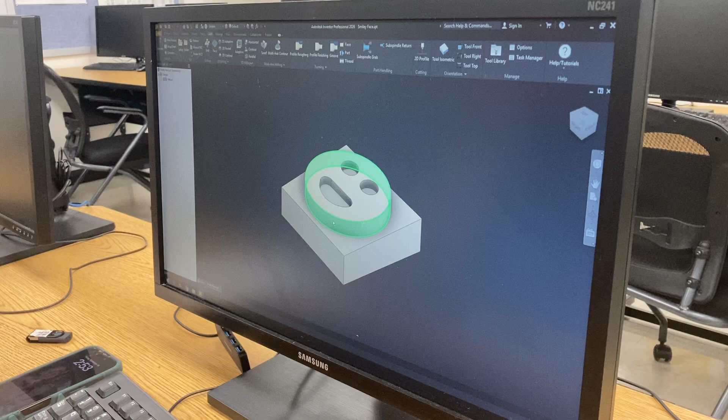Okay, so this is where we're going to begin programming to mill our cute little smiley face right here out of our piece of aluminum. And so a couple of considerations. The first thing we want to note is that we've already created a setup for this piece, and that is setting our origin point for our X, Y, and Z axes.

And if you're thinking, wait, whoa, how do I do that? I can't remember. We have explained this before in our Haas tabletop mill tutorial series, so you can revisit that for setting the origin. We're just trying to save some time here because we are trying to look into new considerations like we see over here.

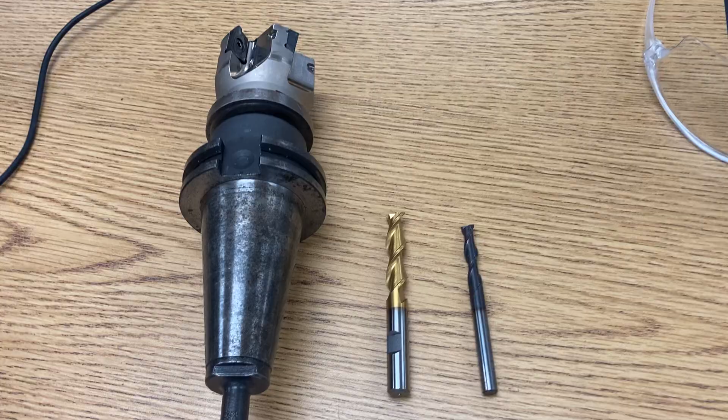We're going to be creating a tool pathing program that incorporates 3 tools. This face mill that you see right here, that 3/8 inch end mill, and then this 1/4 inch end mill. Now, I think it's worth asking, why would we do this? Why would we want to use multiple mills when you'd think it's easier to just make a program for one? Why can't we just use this 1/4 inch end mill for everything, to cut out

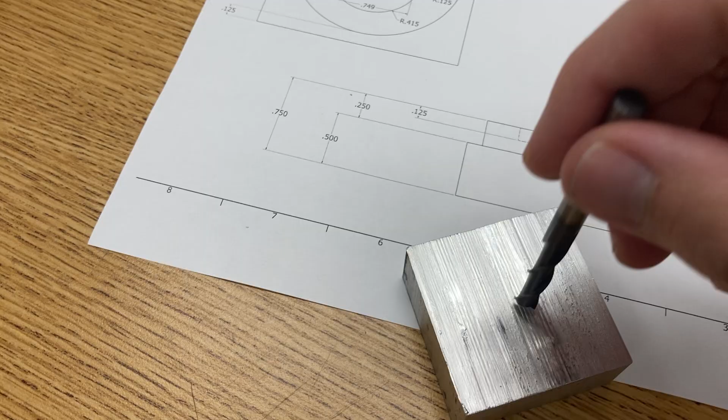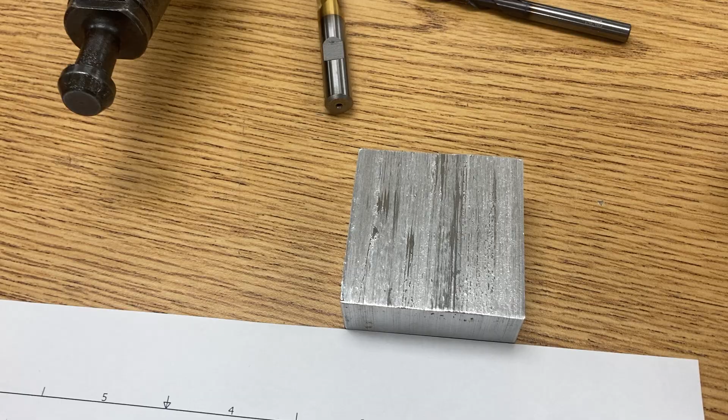this piece of aluminum? Well, that's because it's actually not a very efficient tool path to try and cut all that material when we could do a lot more in fewer passes with a larger diameter end mill. The same way that if you had to mow 5 acres of grass, you'd much rather have a lawnmower to do it than a weed eater. But if you have a tiny little patch in a corner near your house that you have to get into, that's the time when you want the weed eater instead of the lawnmower.

And this face mill has a very specific purpose itself. It's going to do the first task, which is cleaning up this, as you can probably see here, pretty crooked top part of our piece of material. So I got a nice stock bottom here, but the top is pretty rough. So the face mill is going to come along and clean this off for us.

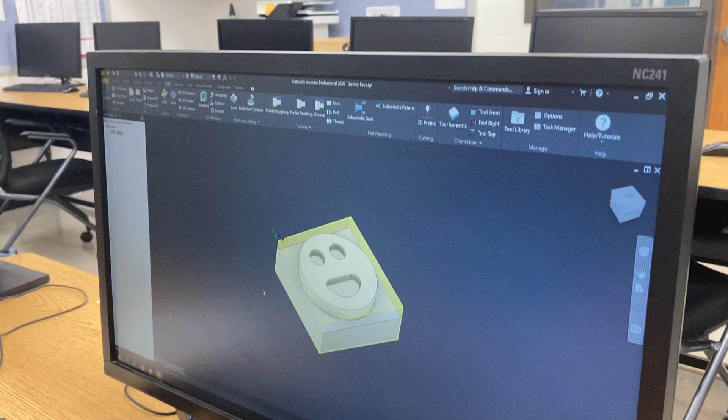So now that we understand why we are using multiple tools, let's get into how we actually set this up to incorporate tool changes and whatnot. I've got Mr. Monroig here to help us out. Mr. Monroig, are we going to start out with the adaptive to program for this face mill? No, we won't use an adaptive toolpath for that.

We have a facing operation here under our CAM tab, which should also be in the tabletop demonstration, like where to find stuff. So starting out, we're gonna click our face operation, and the first thing we need to do is give it a tool to use. So we click our tool tab up here, find our library. In our libraries, we don't have a facing mill, so we actually have to build the tool real quick.

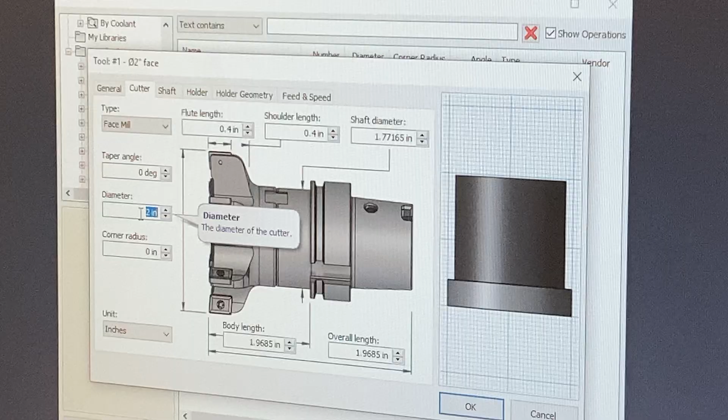So we have tool type is a face mill. How did you find that? Underneath my tool, when I click my tool, it comes into here and we just click new mill tool. Oh, you said new mill tool. Okay. Yeah, new mill tool, and we open that up, and your tool type's a face mill. The diameter of our tool is a 2-inch face mill.

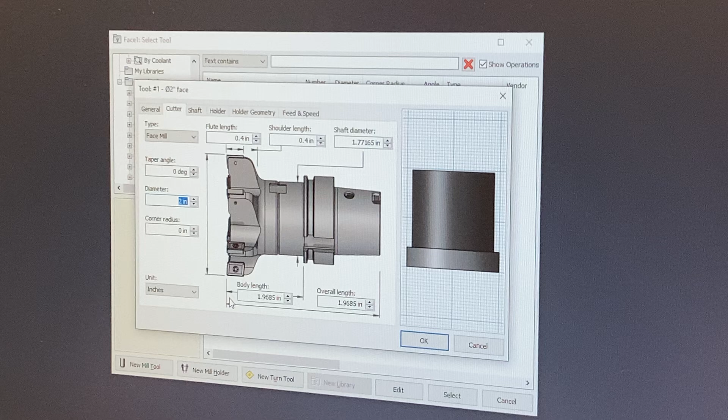Our flute length, all this is pretty standard. We don't need to really change it. We're not going to do anything too aggressive as far as our depth of cut or utilizing the side of the cutter at all. We're mainly just wanting the inserts and all that to stay the same. All we need to make sure is that diameter is right. And our tool, this is going to be tool number 1, and use offsets 1 for the length, whenever it looks for it in our tool library. Don't need to change anything here.

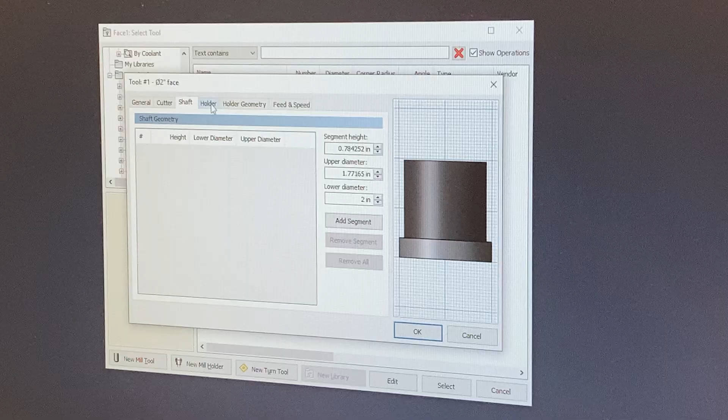Our speeds and feeds, we're going to run this at 2,000 RPMs, and we're going to feed it at 25 inches per minute. And this is because of the fact that we're cutting through aluminum? Yes. Okay. We could be a little bit more aggressive, but we're going to program this in a more conservative manner.

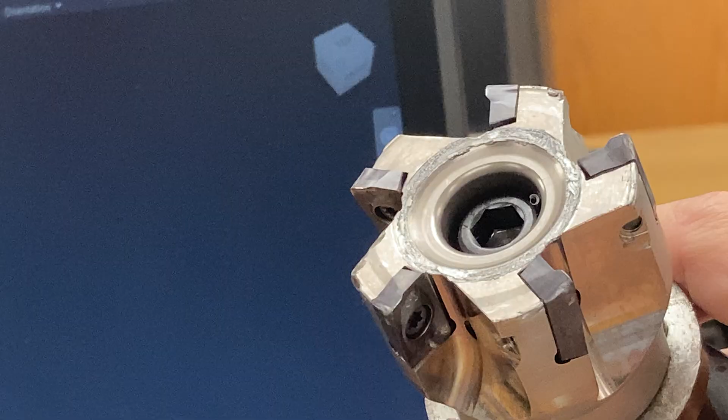And I noticed you're accounting for the number of flutes. Yep. So he's putting 5 on there because there are 5 teeth on this end. And the reason that gets affected is your feed per tooth, which you use in your calculations for your feed rate, varies based on the number of teeth that you have. So we're going to hit OK here. You can see our tool is in our library now. We're going to select that tool.

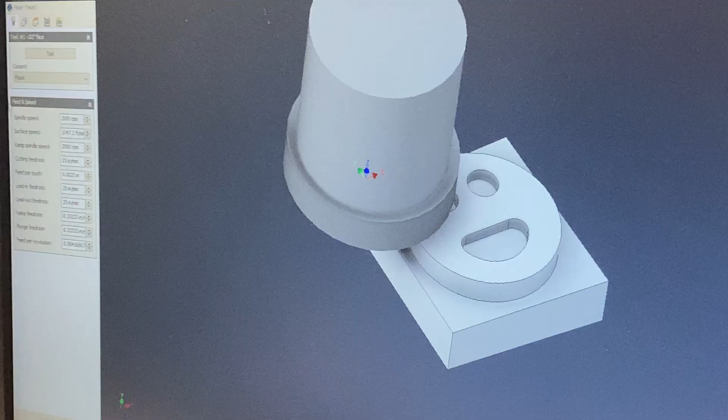And then it went in here and it changed all of our spindle speeds and feed rates already for us, because we put all that in when we built the tool. So the next thing that we're going to do is go to our geometry tab. It already has the default stock selection. It sees the stock that we want to cut there, so we don't need to do anything with that.

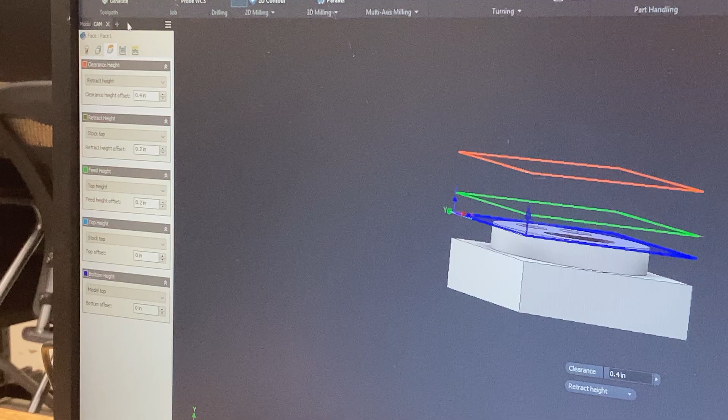Your levels here, you can see it's cutting at the top of our finished surface already, our model top in here, so we don't need to make any changes there. We'll go to our passes tab. Your step over, it's gonna use a little less than the diameter of the cutter for a step over, so there's a slight bit of overlap for good cleanup. But since our material size is under 2 inches, it should just do this in one pass unless it offsets. So we might need to make a change after we generate the tool path.

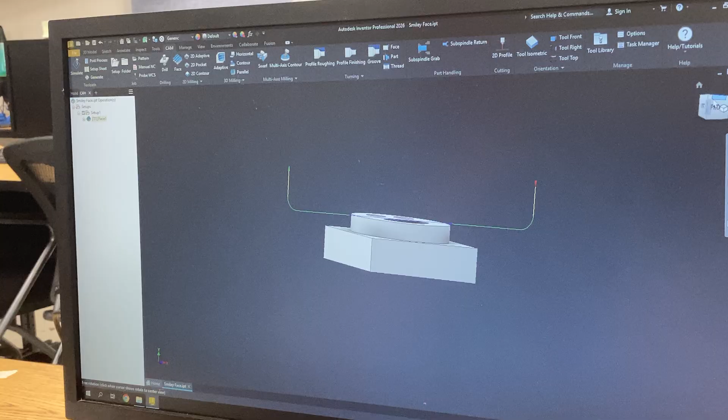And then our linking parameters, the only thing I ever really want to do is I want it to extend before I retract, so it gets off of my part before the tool holder comes up, so it doesn't leave marks on my part. So we're gonna hit OK here and see what our path generates. And there you can see it makes one pass, comes down, across, and up. So that's our facing operation.

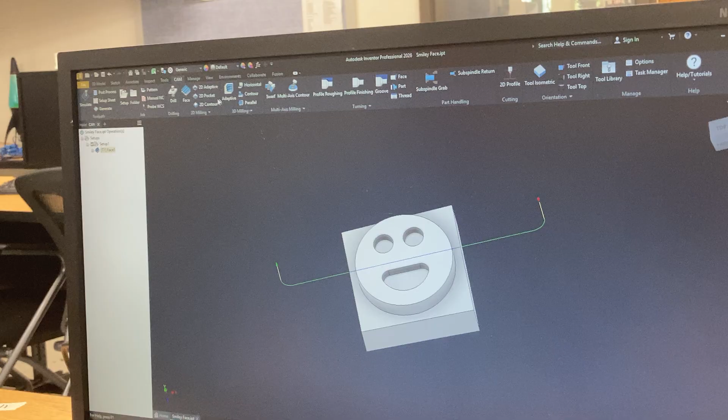Now, like Dr. Stratman said, we don't necessarily want to use our face mill to come in here and get rid of all this material. So this is where we're going to utilize our 3/8 end mill and go into an adaptive path. We're going to use 3D milling, not 2D milling. The 3D milling will look at your model and cut only the stock that it detects, and it will not cut into your part. So we're going to do that 3D adaptive.

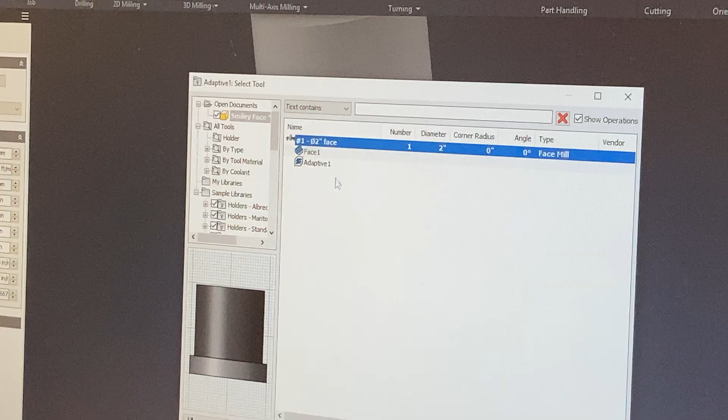So now that we're in our 3D adaptive, we don't want to use our 2-inch face mill, so we need to go back into our tools. We're going to go down into this inch aluminum library right here. We're going to search flat for a flat end mill, and we want a 3/8 flat end mill, and we are going to select that for our tool. We don't need to change any of our geometry of our cutter. What is there will work just fine. So we have our 3/8 end mill.

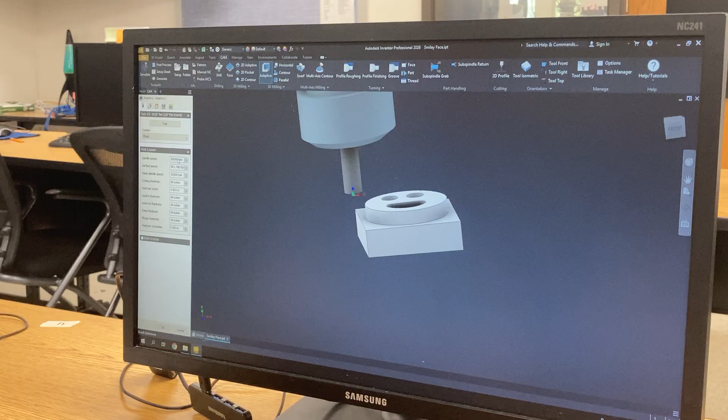We're going to bring our RPMs down. We don't want to run 10,000 because our spindle max is 6,000 on those. We're going to put this at 4,000 RPMs, and we are going to do a cutting feed rate of 60. How did you determine that cutting feed rate?

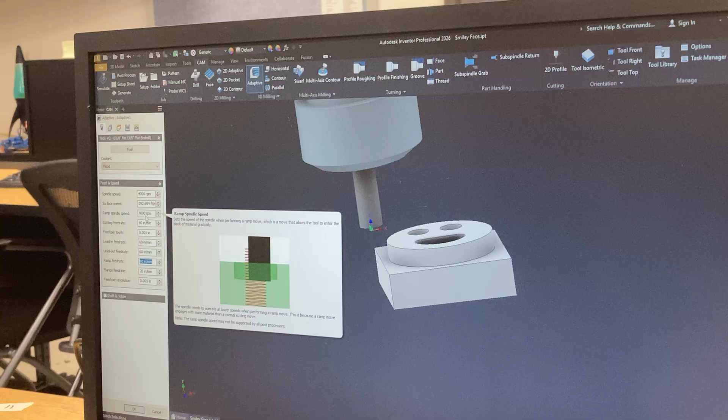So when we're cutting aluminum on a CNC and we have rigid tooling and stuff, we can be a little more aggressive than what we can on a standard Bridgeport. So your normal 3.82 calculation doesn't necessarily get you what you want, because aluminum can be calculated a little bit differently. If you go too slow, your tools are going to load up and gunk up with chips. They're not going to clear.

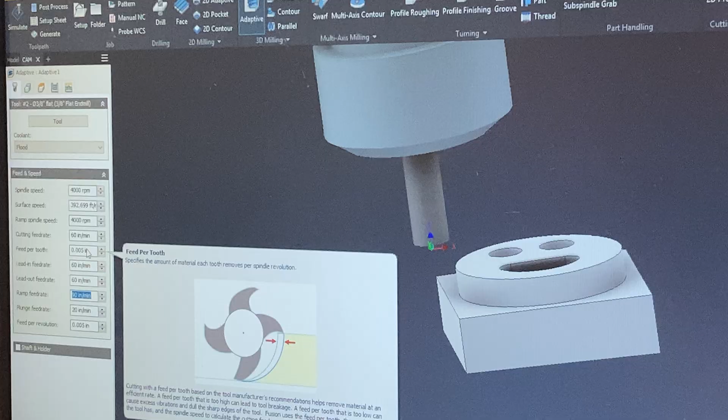And a reason that we go high RPM, high feed rate is because later on when we get to our passes tab, we're going to look at our tool engagement, and it is faster for a machine to run fast RPMs and fast feed rate but take less of a cut, because that tool is not having to slow down so much to get through the part. It's easier on your tool, and it won't wear down or break as quickly. So we will ramp up our feed rates here and do a lighter step over so that we can get this done as efficiently as we possibly can.

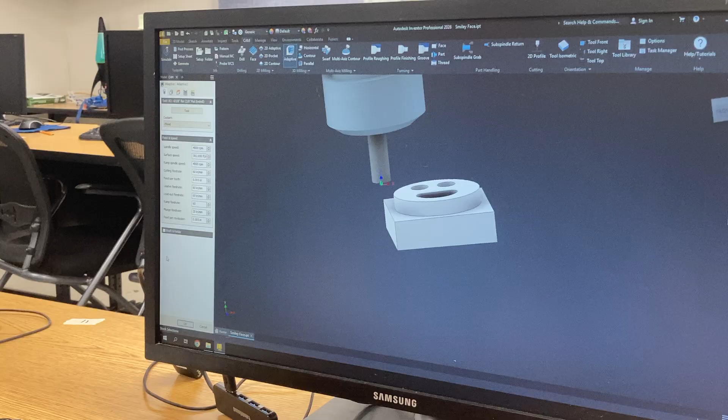Okay. So you can see, whenever we put an RPM in there, 4,000, it calculates our surface feed to be 392. So that's like when you're looking at your equation, your 3.82 times your surface feed divided by your diameter. That's the surface feed that it's using to run at 4,000. If we wanted to do like a standard 200 surface feed. Yeah, that's kind of why I was asking, because I know the aluminum set value is 200.

So if you use your surface feed of 200, it's going to put your RPMs in there at like 2,040, which means you're going to have to slow your feed rate down. But with aluminum and these cutters that we have today, if you ramp up this value, as long as you put the feed rate in to go with it, the tools can do it, especially in aluminum.

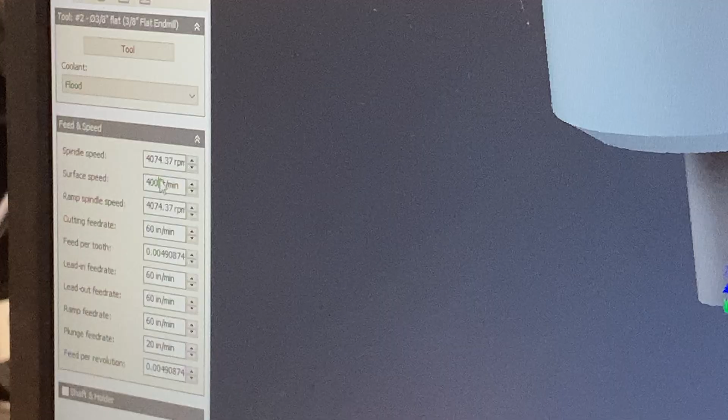If it was steel, we would look at this in a whole different manner. But the fact that it's aluminum, it makes that okay. We can be a little bit more aggressive. Because it's a soft metal. Yes. Okay. So for the sake of this example, we're going to just use 400, or 392 I think is what it was, to get us close to that 4,000 RPM.

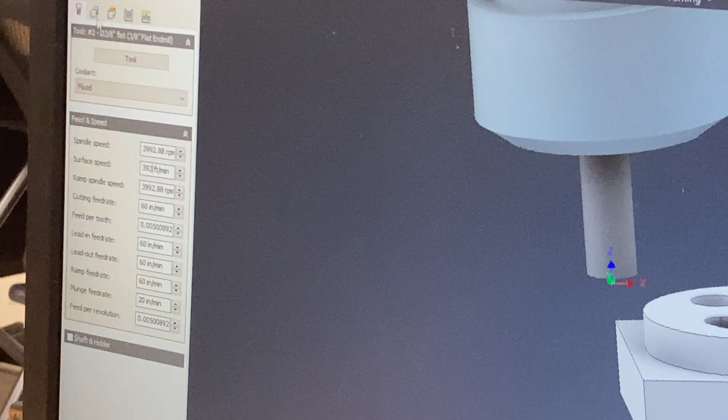We're going to feed it 60, and with something like machining, while you can calculate this stuff, it's not exactly a finite thing like you have to do this. Your machine will talk to you. It'll let you know by the sounds if it's right, and then you can manipulate it at the control. You can speed it up or slow it down if it sounds right or wrong. So we'll go with this for now, and if we need to modify our values at our machine, we can do that later. So we're going to go to our geometry tab, and we don't need to select any contours.

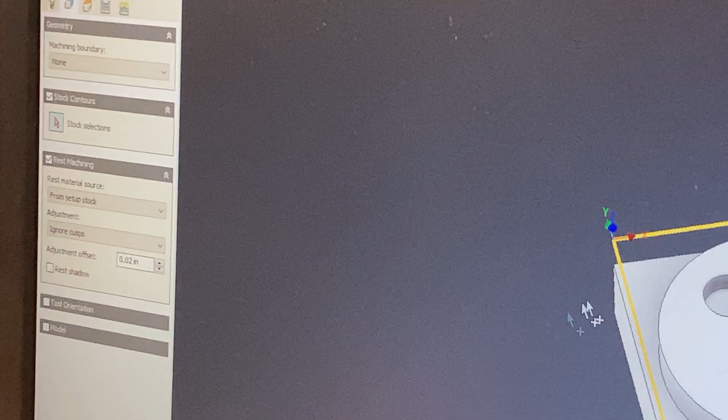It's going to look at our material in our rest machining here, so it's going to see what has been cut if we change this to from previous operation. So it's going to see that previously we faced our part, but that there was nothing else cut from the stock that we made in our setup. Yeah, so it can see what work still needs to be done. So we don't need to set any boundaries or anything like that, because we're wanting it to look at the part and get into the areas that it can.

And then our bottom height, we do not want to cut all the way down to our part. We only want to cut to this surface here. So I'm going to change my bottom height to selection, and then I'm going to select this face right here. You see it light up? Yep, this should be familiar to anyone who's watched our Haas tabletop tutorials. Yeah, so we select that. We have our selection set there.

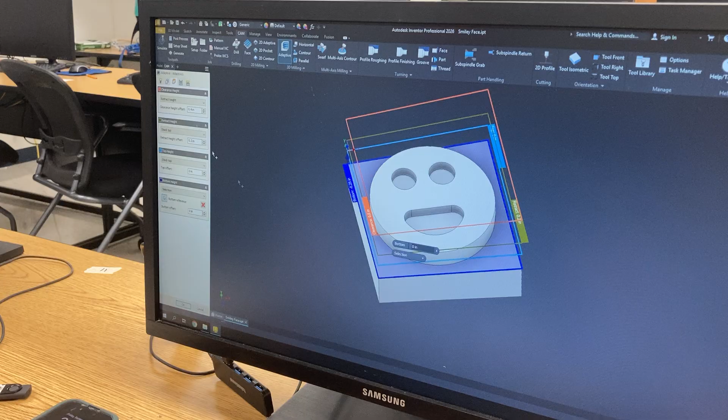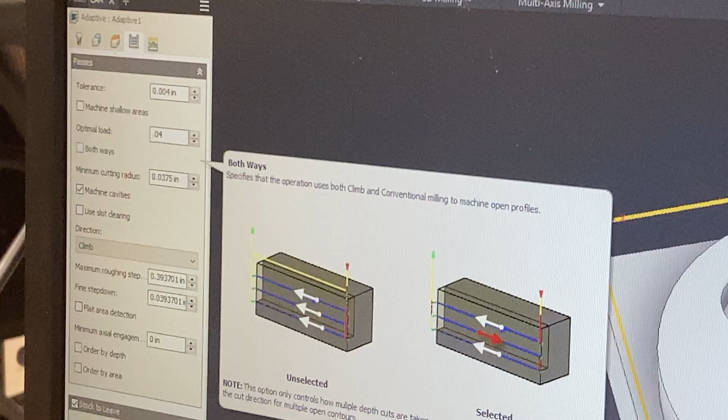Now we're going to go to our passes tab, and this is where we're going to look at our optimal load. So our optimal load is basically the amount of engagement that the tool will have in the given part. Like how much material it's trying to bite off. How much it's stepping over into the part. So we're going to set this value at 40 thousandths, because at our RPMs and feed rate, we don't want to do too much because it's going to put a lot of pressure on the tool and could break it. 40 thou is a good amount for a 3/8 cutter to effectively cut. So we're going to go with a 40 thou step over.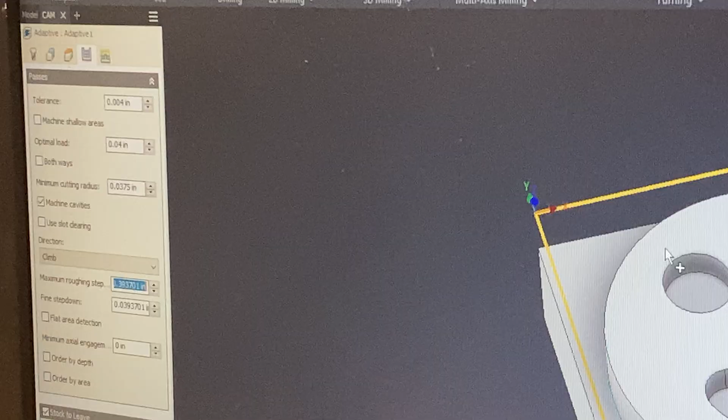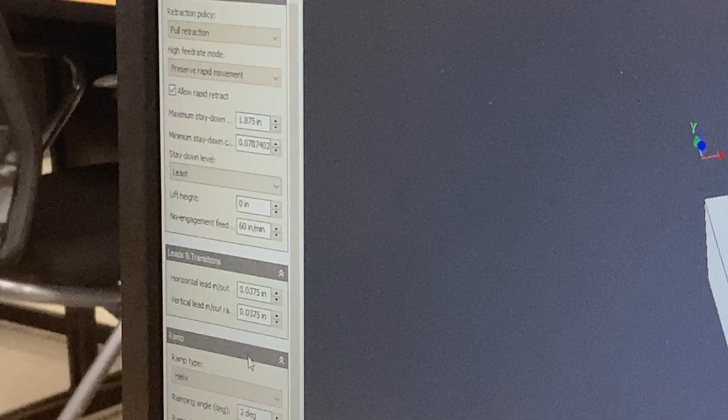For this tool, we're not going to mess with our lead-ins and lead-outs. What we have here will be fine. So we're going to leave all of this the same, and we'll revisit this when we go to our next tool. So we're going to hit OK to generate our tool path. And there you can see it generated our adaptive path. Okay, so this is now officially a more complex program than anyone who's worked through our tutorials before has done, because we now have a tool change in here.

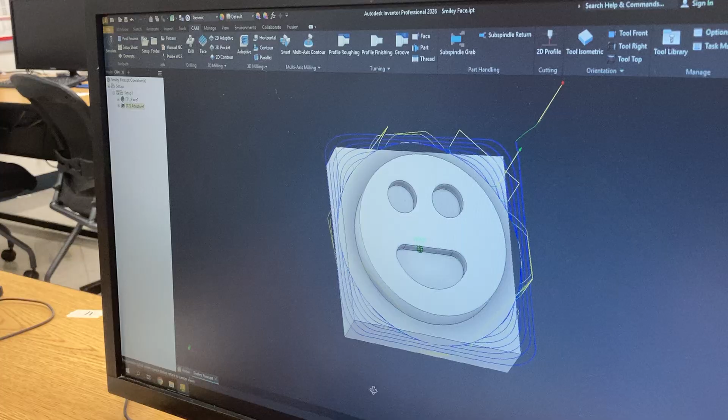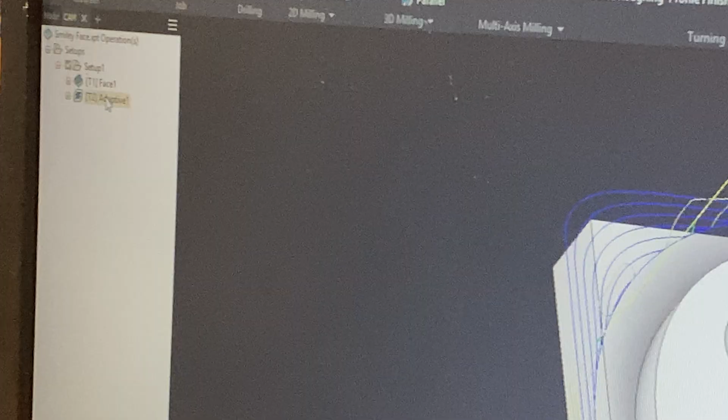I can see in the setup you've created, it says face 1 and adaptive 1. So the program already knows, as soon as it's done running the face program, it's going to automatically jump into that adaptive, and that is going to cause the machine to do a tool change, to put the facing mill away and go grab the 3/8 inch end mill out of that carousel. So that's something that is auto done by Inventor when it creates its program. Yes.

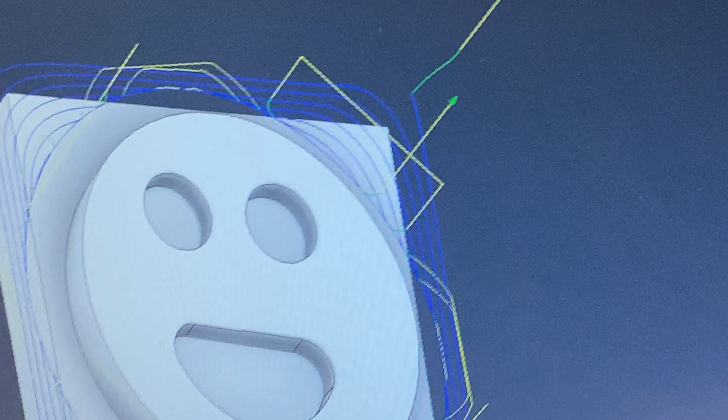So that leaves us with our 1/4 inch end mill, and it's going to serve a very important purpose, because as we can see, the bigger exterior area the 3/8 end mill can get to very efficiently, but it cannot fit into these little eye holes, because a 3/8 inch end mill is too wide to get into these little 0.33 diameter holes. And so we need something skinnier like this 1/4 inch end mill to do that. So let's get into that final tool change.

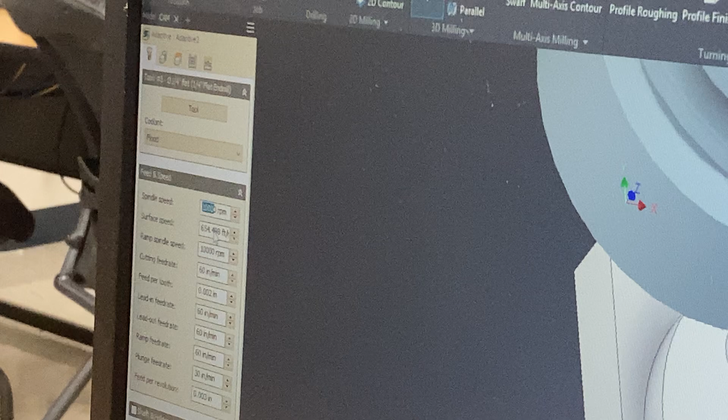So here again, we're going to start off with our adaptive clearing tool path. We're going to go to our tool tab. We will go to our inch aluminum, type in flat again, grab our 1/4 inch, and this one we'll actually use our 200 surface feet because we're gonna be having to helix down into our parts. So we're gonna run a little bit lower RPM, a little bit slower feed rate, maybe about 25 on our feed rate. 2 thousandths per tooth is okay.

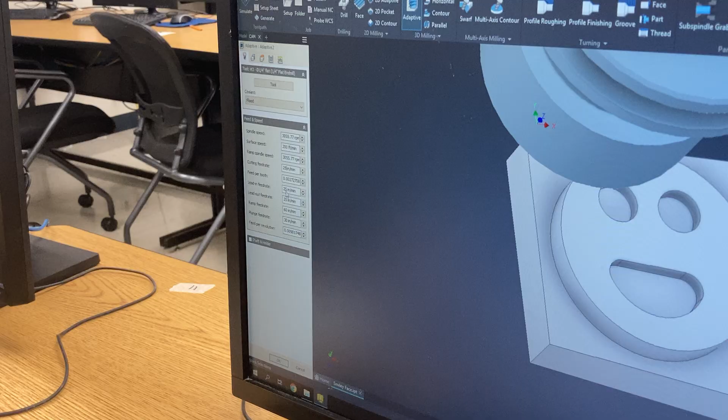And then we're gonna bring our ramp feed rate down to 18 and our plunge down to 10 because we don't want to plunge or ramp too aggressively into our part. We want to make sure the tool has time to cut, and we're going to leave those feed rates the way that they are there.

We're going to go to our geometry. Now here we do want to give it some boundaries because we already cut all this profile out here on the outside. We want to stay within these boundaries here. So the smiley face of the circle, eyes and the mouth. So we're gonna select boundaries. Under selection here, we want to keep the tool inside the boundary, and we're gonna select both of the eyes and the mouth of our smiley face. So we want to cut inside these 3 areas.

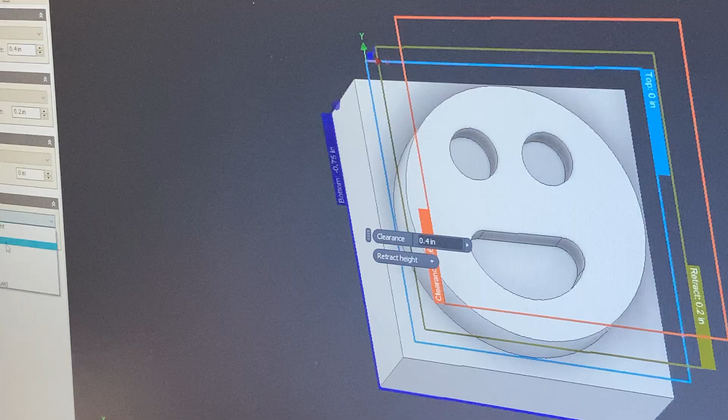We're gonna let the rest machining see the previous operations, what has been done, just like we did on the previous one. So we selected previous operations there, and we'll leave everything else the way that it is. Our depth, here we want to do our selection again as well. We want to select the floor of our eyes and mouth. If you orient that to the side, you'd be able to see that you've selected a different depth because we're not going all the way down to this edge. We're going to the base of where that eye and mouth are because it's a different depth. Right.

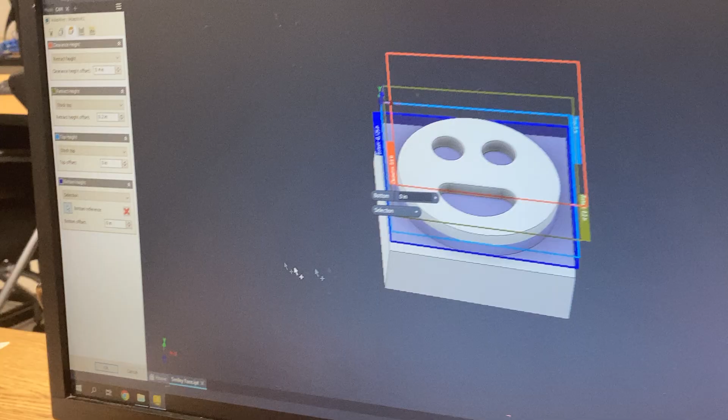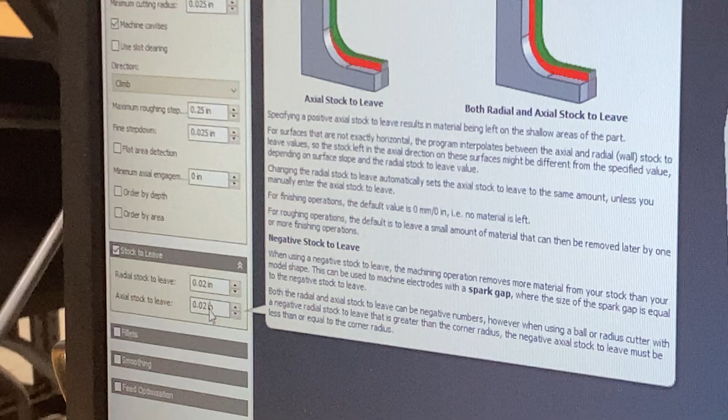So we have that set. Now we're going to go to our passes. For our optimal load on this, it's a smaller tool, so we want to be less aggressive. We're going to go with a 20 thou engagement on our tool. Our roughing step down, we'll make it 0.25. 1/4 inch is our max step down that we're going to do with this one. Fine step down's fine. Everything here is fine. We're going to turn our axial stock to leave to 0. Radial, we're going to leave 20.

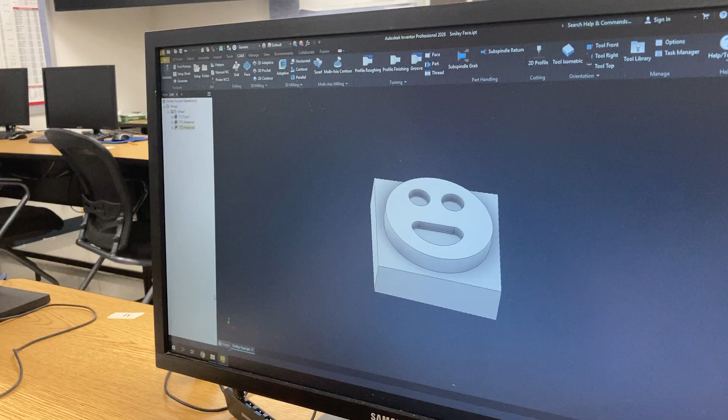And for the time being, we're going to leave all of our lead-ins the way that they are, and we're going to attempt to generate this tool path. So we're going to hit OK here. Yeah, and this is going to produce an interesting result that's going to give us a chance to talk about something a little further. So you see on this profile over here, there's a little yellow check mark. We can right click on it, go to show log, and we can see it's an empty toolpath. It wasn't able to generate anything. So we're gonna have to troubleshoot this and try to figure out what is causing this.

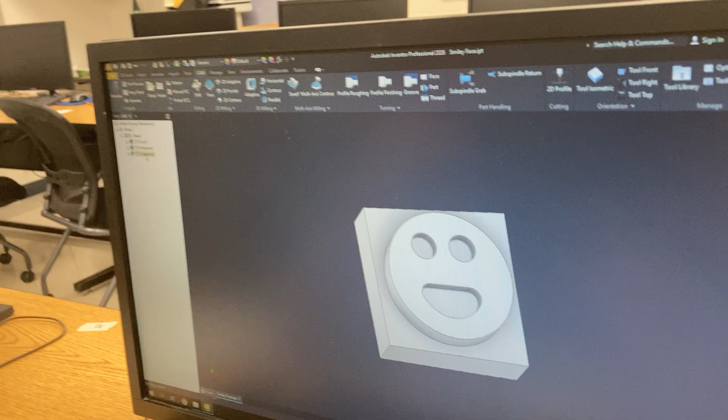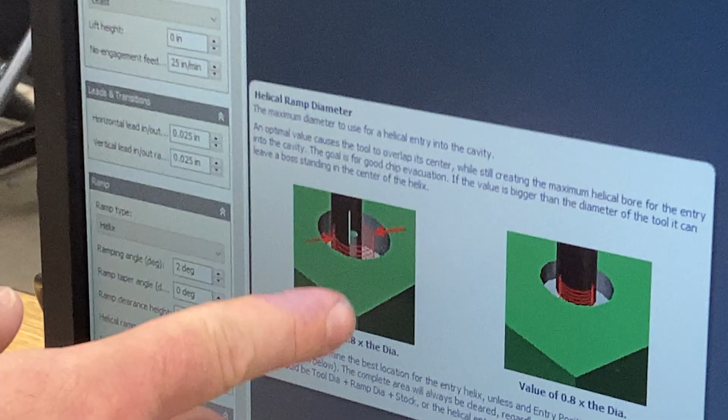So in these pockets, it's gonna want to try to ramp down and helix into these pockets to cut the material away down to the bottom and then open these pockets up. And due to the diameter of them, we have to control the circle diameter that the ramp is trying to drive around. So we're gonna open our adaptive path back up and edit it. We're gonna go to our linking tab and look at our ramp lead in. It's trying to do a helix, and the diameter that it's trying to helix around is 0.2375. So basically, the center of your tool is trying to run around that helix right there, and in doing so, that is going to collide with our stock.

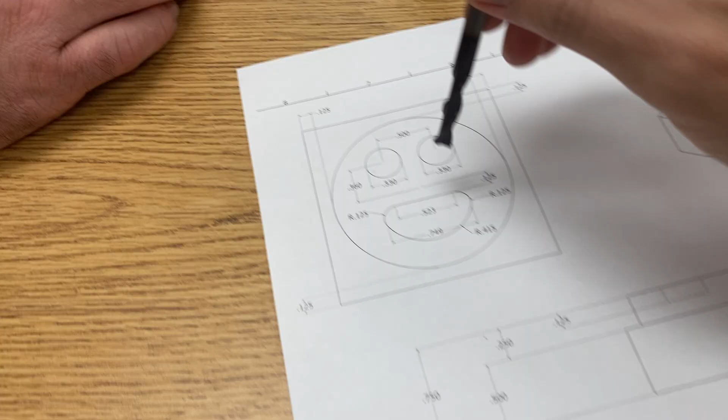So we need to manipulate that diameter and make it smaller so that it can run around inside that pocket and you won't have engagement on the outside of your tool. Yeah, in other words, looking at this blueprint, for the engineer or the machine tool student who's like, hey, I have a 1/4 inch end mill. This thing is 0.33. 1/4 inch is smaller than 0.33. What's the problem? It seems like there shouldn't be any.

The issue we're describing here is that your tool is not going to go straight down into that pocket. It's going to be spiraling in like this. And because of the wide sweeping spiral that it wants to make, that 0.25 is actually going to collide outside that 0.33 boundary. So we need to tighten up that helix so it goes down in a very tight pattern.

Right. So you might have to plug and play a little bit, try a couple different values. I'm going to start out telling it to drive a 50 thousandths diameter circle, which is pretty tight, but we do have a pretty small surface that we're trying to get into here. So we're going to start off with that. We're going to hit OK and see what we generate.

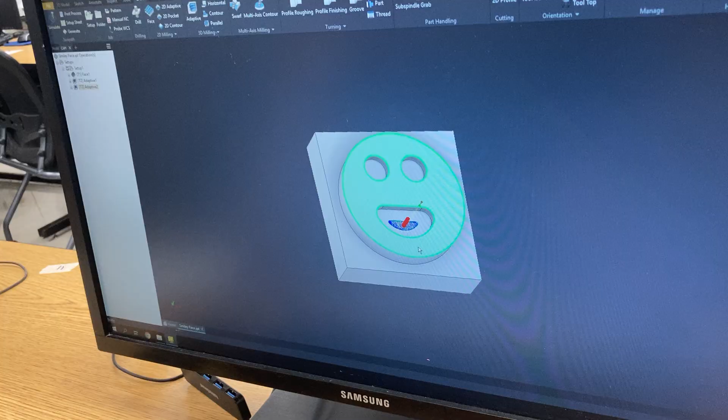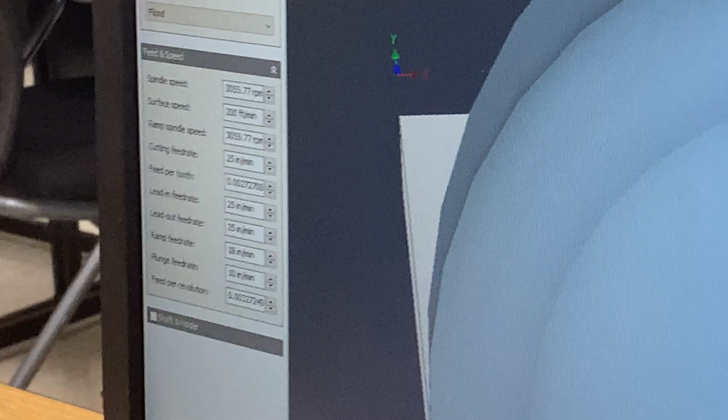So you can see we have it generated in here and it was able to get down into the lower part of the smiley face. It did not generate a tool path in the eyes of the smiley face. So we're gonna have to go back in and try to edit that to see if we can get that value to work. So we'll go back to our linking. Let's look at all of our stuff. We'll see what it does on a 25. And again, we're having an issue.

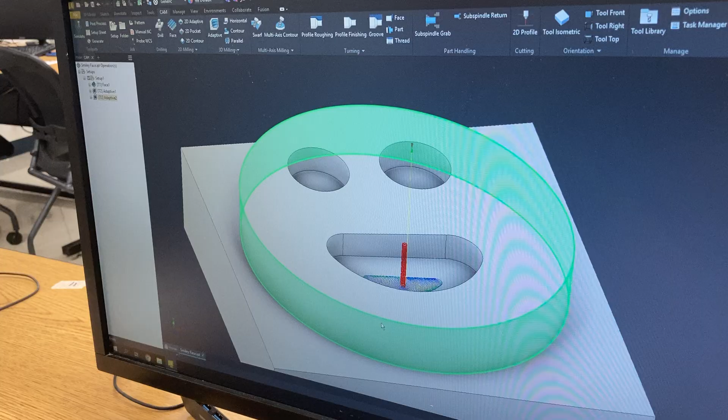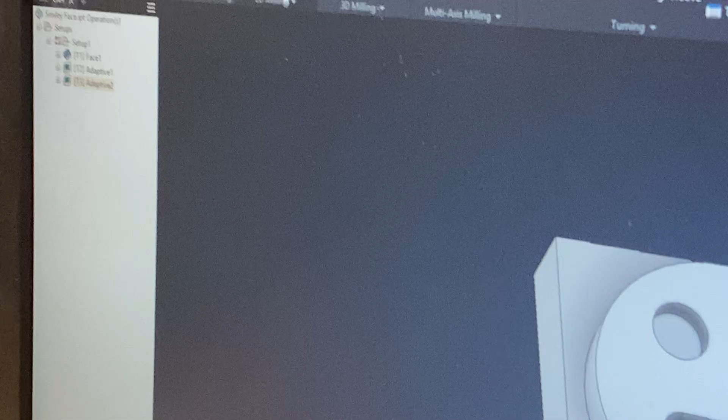So in a situation like this, where I know if I just ramp around these eyes, half of my cutter will clean that up, I'm gonna leave this the way it is, and I'm gonna add a 2D contour toolpath here. Okay, so we now have our second adaptive, and we're gonna do a 2D contour to get those eyes. Yes. So I'm gonna click this 2D contour.

We're gonna use the same tool with the same values set for the feeds and stuff. Yeah, it's already got that 1/4 inch in there because that's what you were most recently using. Yes. And then we're gonna select the 2 circles we wanna drive, which is both of these eyes here. And I notice on the contour, you're grabbing the bottom of those circles rather than the top. Yes. The reason we grab the bottom of those circles is because we're gonna machine at the selected contour level. So the bottom of those eyes is where we wanna machine to for our bottom height.

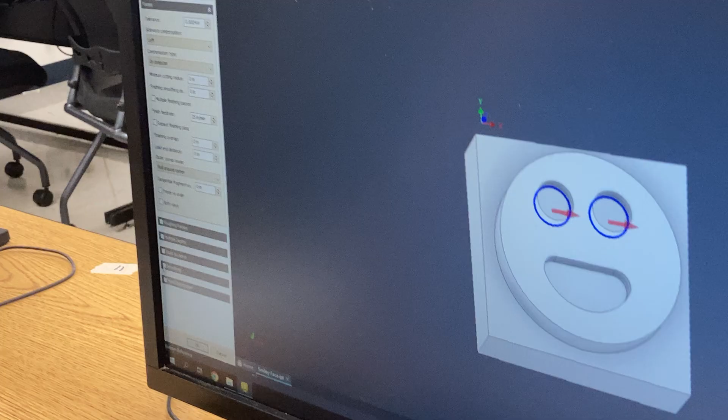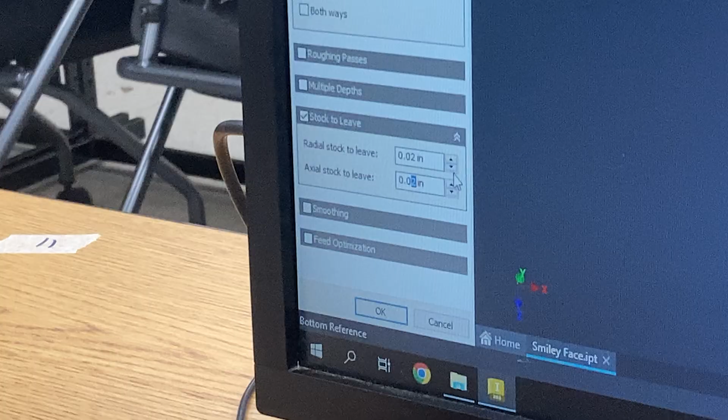We're going to click our passes here. Everything here is all fine. Our feed rate, since we're only roughing here, is going to be left at 25. We're going to check our stock to leave, and we're going to put a 20 thousandths value in our radial, and we'll just go with 0 in our axial. In our linking, we're gonna turn off our lead in and lead out transitions, and we're gonna turn on our ramp. We're gonna put our clearance height at 50 thousandths above our part.

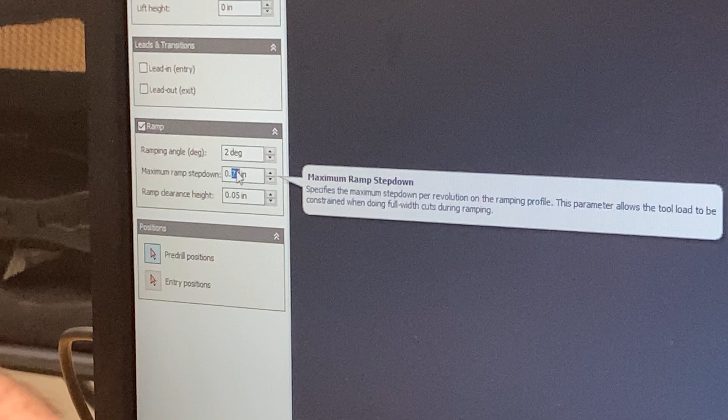Our maximum ramp step down is how far down in Z it's gonna go in a 360-degree pass. So we only want it to go about 75 thousandths deep, just so we're not being too aggressive. We don't want to try to take that all in one fell swoop. So now we're gonna hit OK and look at the toolpath that it generates here.

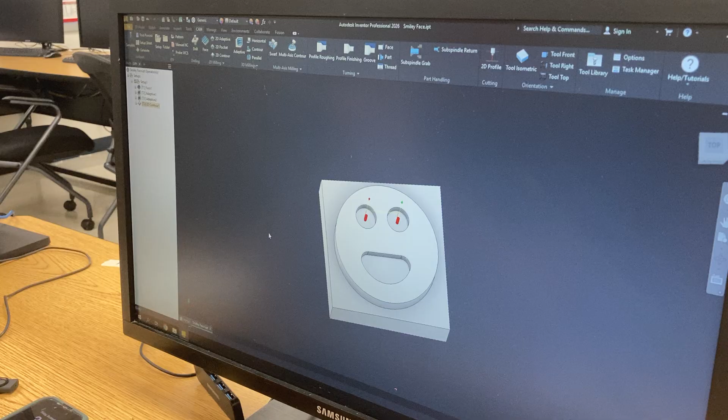So you can see it holds a really tight spiral, and it's gonna rough out all of this material in these eyes. Similar to what it does on our adaptive path, but the adaptive wants to clear this floor out. There is no floor to clear out. So real quick, before we set up our finishing contours, we're gonna go ahead and run our simulation because we wanna make sure we're getting everywhere that we want to with all of our tool paths.

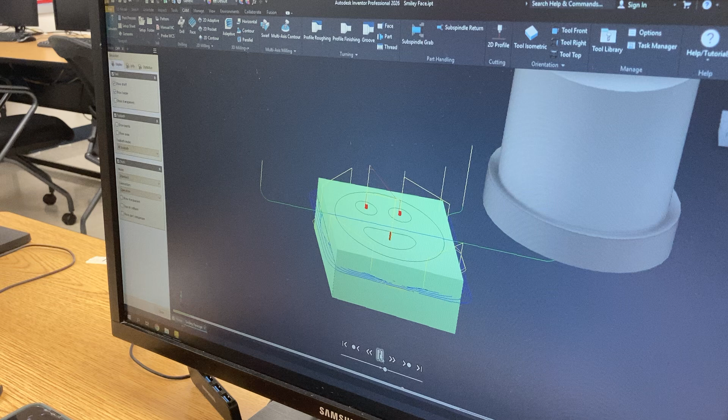So we're gonna select our setup one, click simulate. We're gonna turn our stock on over here so we can see what our stock is going to look like prior to us cutting. Yep. We'll slow down and go ahead and hit play. So here's our face mill coming in to deck the top of our part. Our 3/8 coming in to rough the profile of our part.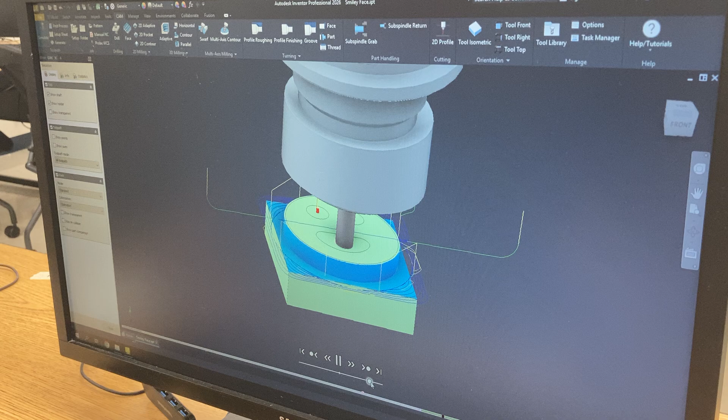1/4 inch end mill, helixing down to open up the smiley face. I do want to point out, you can really see that stock to leave around the edges where it just left a little bit behind. Right here, yeah.

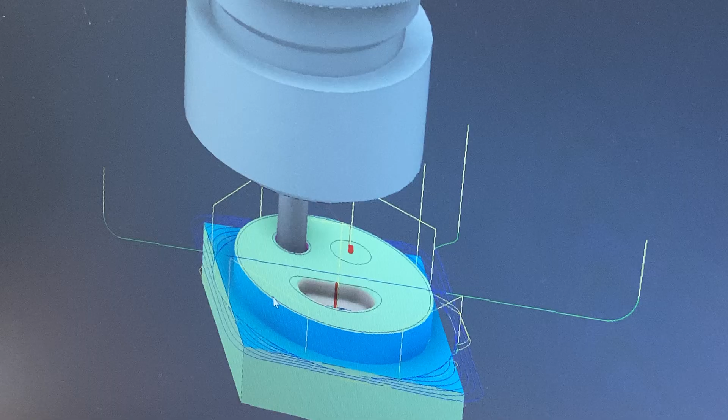All right, so far so good. So one thing I'm gonna point out here, you can see over here on the sides of the smiley face, we have a pretty good amount of stock left in here. We're gonna go ahead and get in there and modify that value a little bit to try to get in there a little bit better, so we're not leaving so much stock, because that's a good bit of stock for a 1/4 inch to come in and clean up. So I'm gonna go to my adaptive 2 up here.

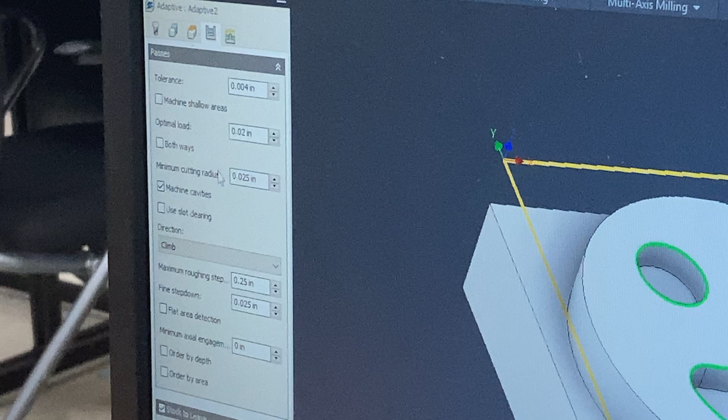I'm gonna open that up to edit it. And I'm gonna go into my passes. And when I look at this minimum cutting radius right here, this is gonna tell us how far into this radius it can get. And we're gonna change that value to 5 thousandths and see if that gets us a little bit closer. Hit OK. Oh, now it's actually letting us get into our eyes.

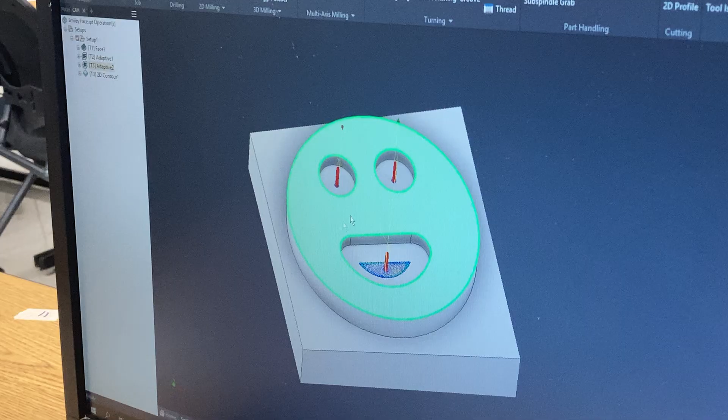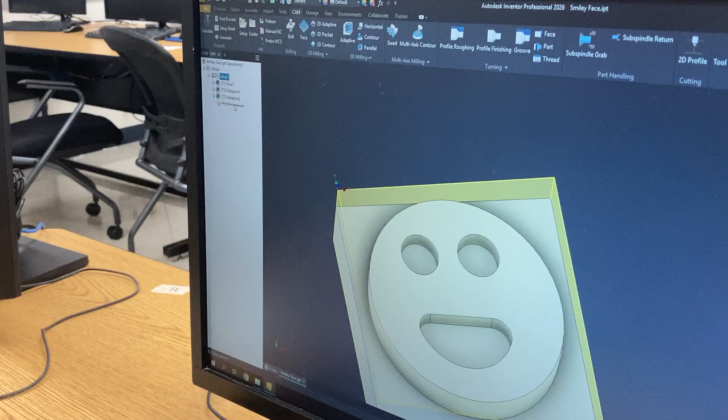So by changing that radius down, it's saying that it can get in closer to this wall than what it thought it originally could. So that makes our contour unnecessary. So for now, we're going to suppress this. We're gonna keep it there, but turn it off so it can't be seen. Yeah, so essentially like deleting it without actually getting rid of it. In case we want to use it later, because what we'll probably do is just take that 2D contour and make it our finishing contour pass now, and change all of the stuff that we're driving.

So I'm gonna run the simulation again real quick. We're gonna skip through our facing and our 3/8 because we liked those tool paths, and we're just going to play our 1/4 inch roughing adaptive path.

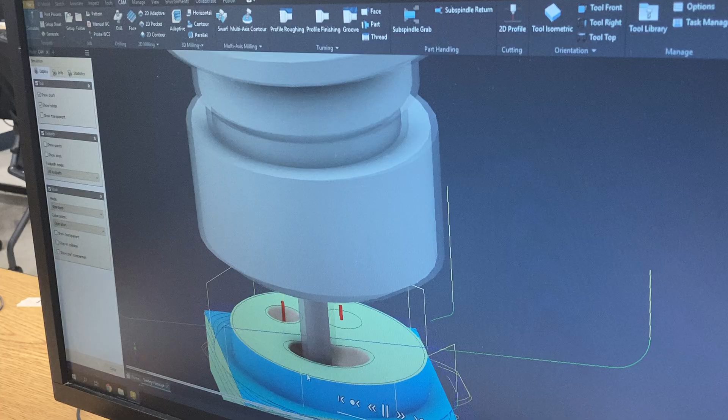And it is getting in there a little bit further. We can deal with that as a cleanup path. We can get by with that. So we have all that roughed in there. We're gonna close out our simulation.

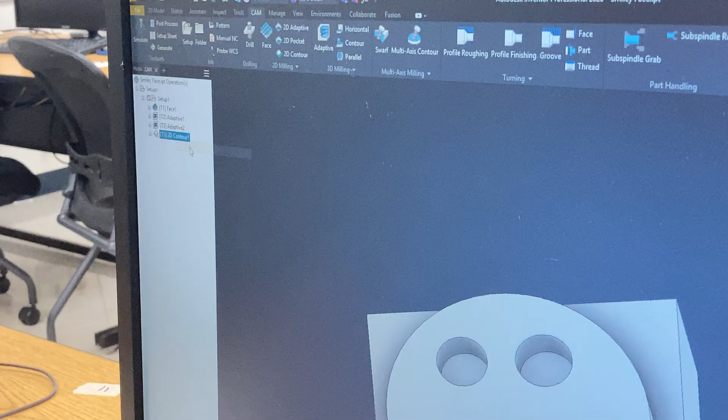We're gonna unsuppress our 2D path, and we're going to edit that path, and this is now gonna be our finishing contour path. So again, we're gonna keep all this stuff the way we had it. We're gonna drive these 2 lines down here, and we're gonna add some other ones. And this is where selecting the bottoms of these lines comes in handy, because if we look at the side of our part, we're finishing at this depth and at that depth.

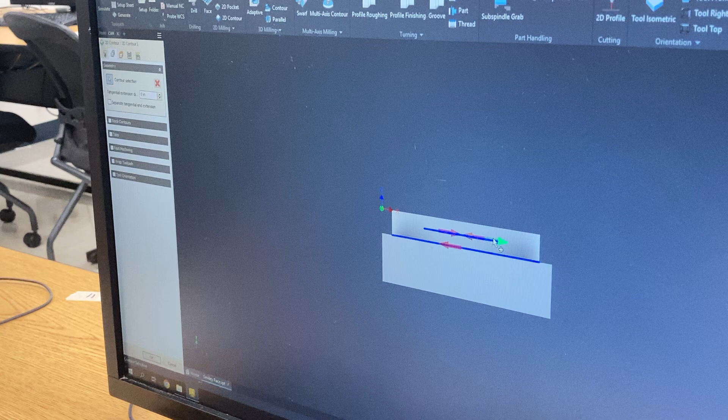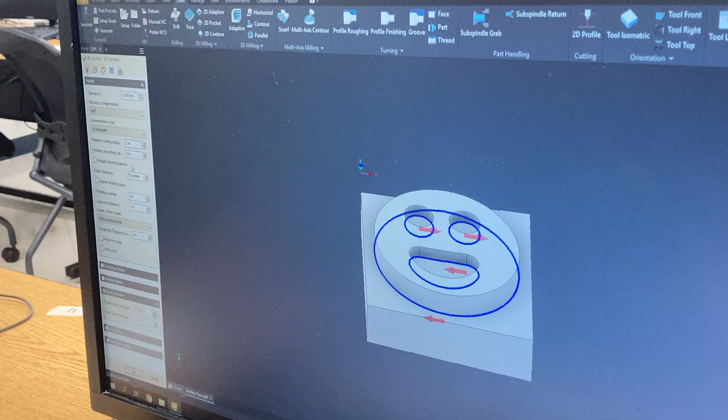And so for our machine to know at what depths it needs to cut, in our heights tab here, it needs to use the selected contour, so it knows at each of these levels we need to calculate the path to cut at these levels. So we got this set, we don't want to change that. We're going to go to this tab here, we're going to turn off our stock to leave.

We already have pre-cut sections, so I'm going to add an entry position to my eyes up here at the center of them, so that it comes down and leads in off of that. We'll turn on our lead in and lead out, and make those 20 thousandths, so we're not going too far. We don't need a vertical lead in. We'll turn our ramp off, and now we're gonna generate this toolpath and see what we have. So you can see it generated everything that we needed it to.

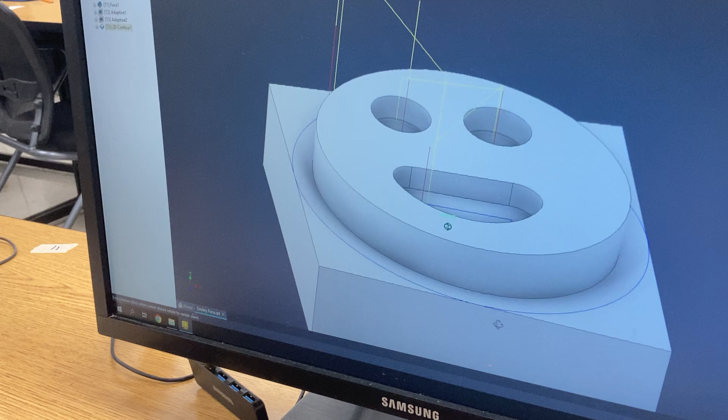Now this is a 2D contour, so we need to go through. It's not necessarily looking at the model, it's only looking at the lines you tell it to look at. So we're gonna simulate everything and make sure our tool paths are good. So we know our adaptives are good, so I'm gonna skip over these first 3 paths. We wanna verify our contour. So I'm gonna hit play,

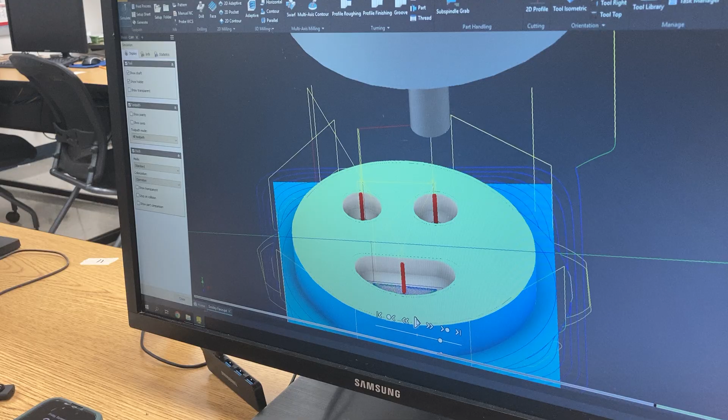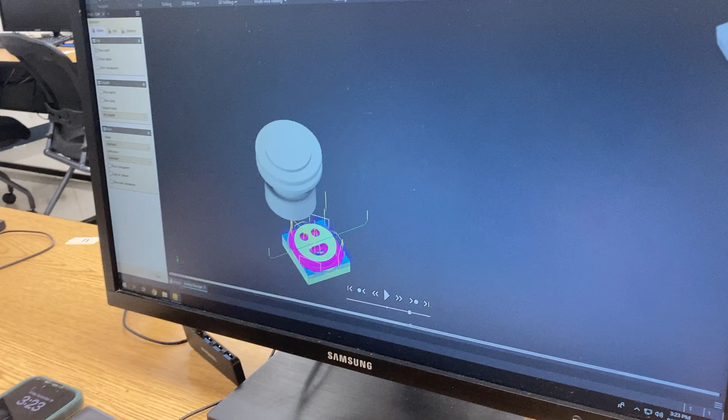and you can see it just comes down next to the part, doesn't collide, and does a nice cut finish. All those surfaces are good, and last our profile. And there we have a finished part. Awesome. So now that we have this, our next video, we're gonna talk about actually posting this for the mill, and then we'll worry about loading up the tools and doing all those next steps. Yes.